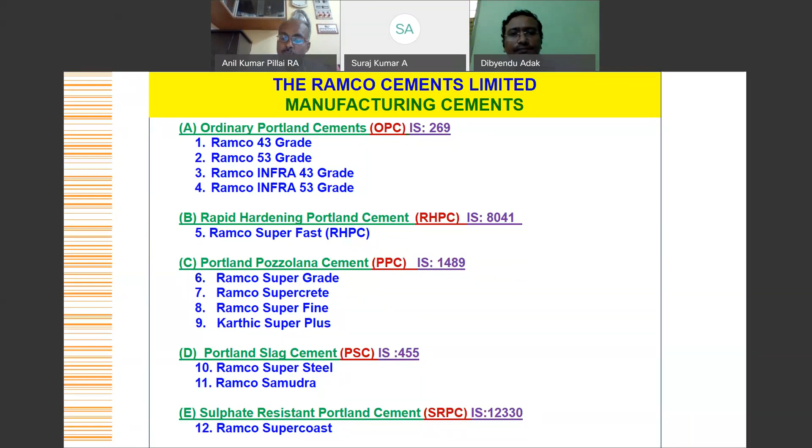Then we have the rapid hardening Portland cement for precast applications. Ramco Supercrete, which is specifically for concreting applications. Ramco Super Grade, Super Fine, Karthic Super Plus. Then we have the PSC cements for steel and Ramco Samudra. We have the SRPC cement, the sulfate resistant Portland cement, the Ramco Supercoast. So these are some of the types of cements that we are manufacturing, 12 brands of cement.

Then we also have the dry mix range of products, which is specifically used for non-structural applications. We have our dry mix plant at Sri Perumbudur in Chennai, and we manufacture dry mix products, which is in technical collaboration with MTech Germany.

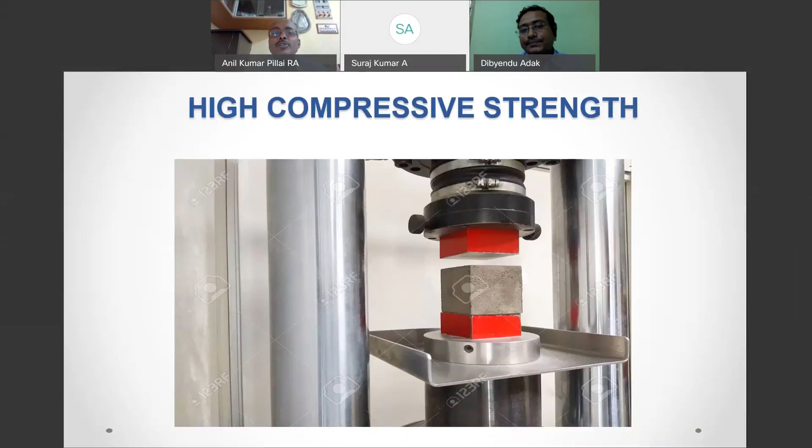Of course, we have got a number of responses as far as Ramco Supercrete is concerned. Ramco Supercrete cement is a specially formulated cement, which is giving high performance concrete, high compressive strength, and at the same time low heat of hydration, low lime leaching, and a better durable concrete is what you get. We have received response that they are able to get the 28-day compressive strength of concrete within 7 days.

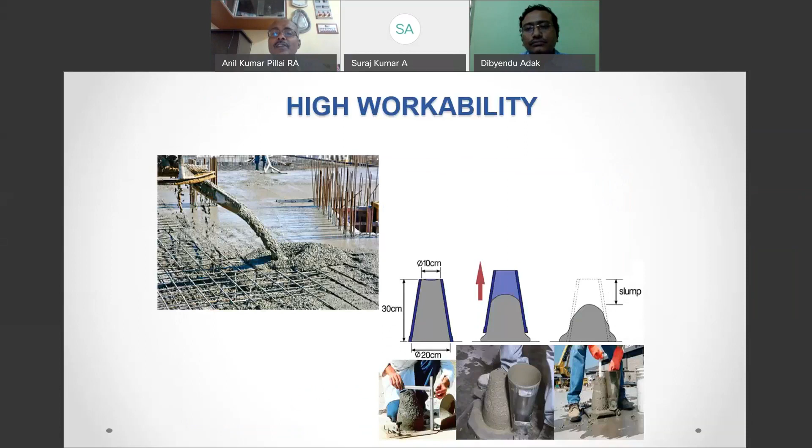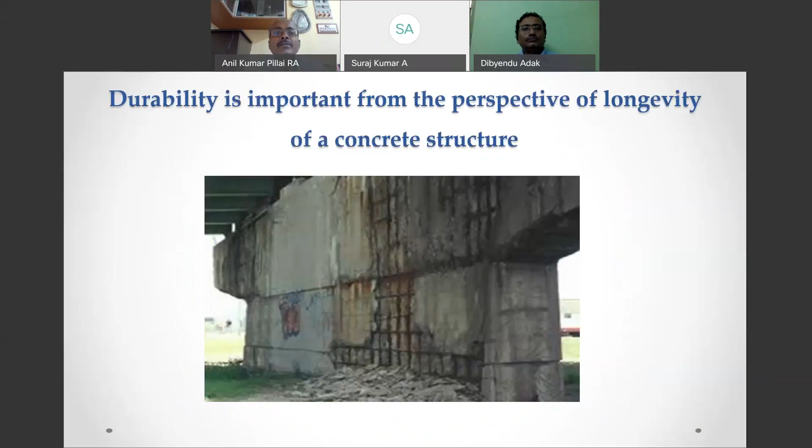So high compressive strength, high workability, because by virtue of being blended cement and as well as by virtue of having particle size distribution in cement, which is controlled, you get high workability, and of course you have the enhanced durability. So we have these important parameters in Ramco Supercrete cement itself, which is being used.

And all this has been made possible because of our research and development center, the Ramco Research and Development Center, where we are doing a number of works on concrete mix design, number of tests, and we have the latest evaluation instruments and equipment, ranging from XRD, XRF, and we have the various types of microscopes to study the characteristics of cement paste.

That is very important because we need to understand what is the property of materials that is there, which is very important from an engineering perspective.

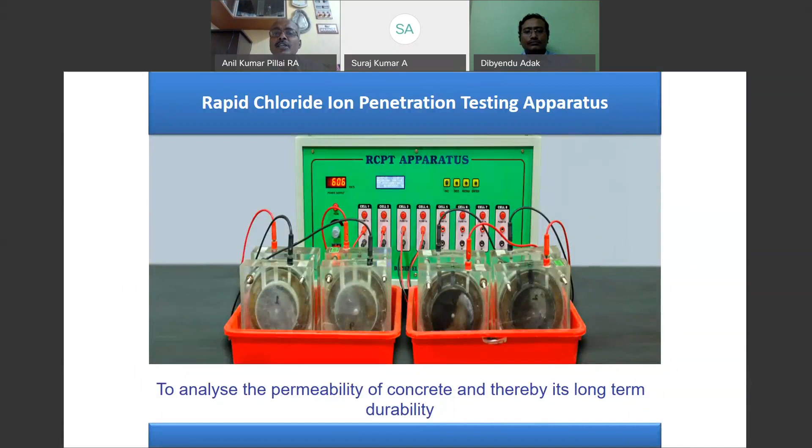Of course, we give a lot of emphasis on durability of concrete, for which we have the various instruments for checking the permeability of concrete, the rapid chloride penetration test, where the concrete specimen is kept, and based on the amount of charge that is passed, you get an idea of the durability of concrete.

So these are some of the things that we have got, and we have also got the DIN standard water permeability test for checking the durability of concrete. Again, instead of rapid chloride, we have the water permeability that is also there.

And of course, the theme is right product for right application, for which we need to understand the type of concrete that is being used.

Various awards that Ramco Cements has received, of course, for leadership in point source and fugitive dust control, leadership in technology and energy efficiency, leadership in utilization of blending materials.

So some of our customers, ranging from big names in the construction industry, where we have been able to give concrete, they have been able to make concrete for various exposure conditions and various concrete grades and various workability and various requirements. So that helps us to make a good quality cement.

As far as today's speaker is concerned, Dr. Dibyendu Adak, who has joined us from NIT Meghalaya. He holds an ME and PhD in civil engineering from Jadavpur University, Kolkata, India. He is currently an assistant professor of civil engineering at National Institute of Technology, Meghalaya, Shillong, and he has over 5 years experience in teaching, research, professional and consultancy activities.

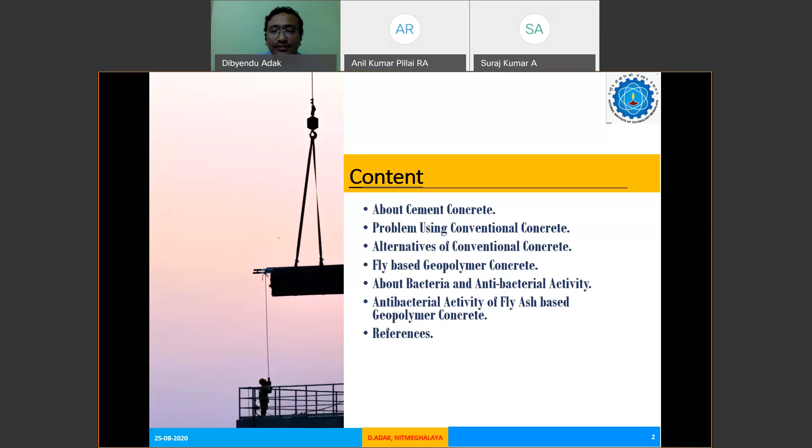Cement allows the aggregates to come together and make a heterogeneous mix, forming concrete. So cement is the main thing.

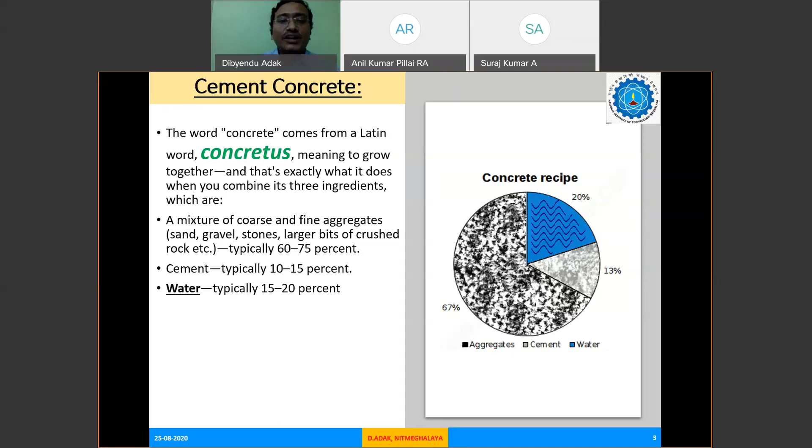But due to rapid urbanization, industrial growth, and day-by-day development of the country, the requirement for cement is increasing. Due to this rapid production of cement, we face certain problems - environmental impacts from cement production. For instance, in 2019 there was a Times of India news report stating that cement production causes more pollution than all trucks in the world.

Also, in 2012, a draft from Columbia University stated that by 2006 cement production was 2.55 billion tons, but would be enhanced to 3.7 to 4.4 billion tons by 2050. But a recent report in 2017 shows we have already achieved that value, which is more than 4.4 billion tons.

So in 2017, that was achieved: 4 billion tons. So when 2050 will come, we think that may be 10 times or 20 times. That will cause pollution. As China is the major producing country, they are producing more cement and also releasing more carbon dioxide into the atmosphere, which is harmful for global warming.

These are the environmental perspectives. Other than this, we can say that cement plants also emit carbon dioxide that causes problems in human health. The maximum problems will be respiratory system disorders, lung cancer, all these things.

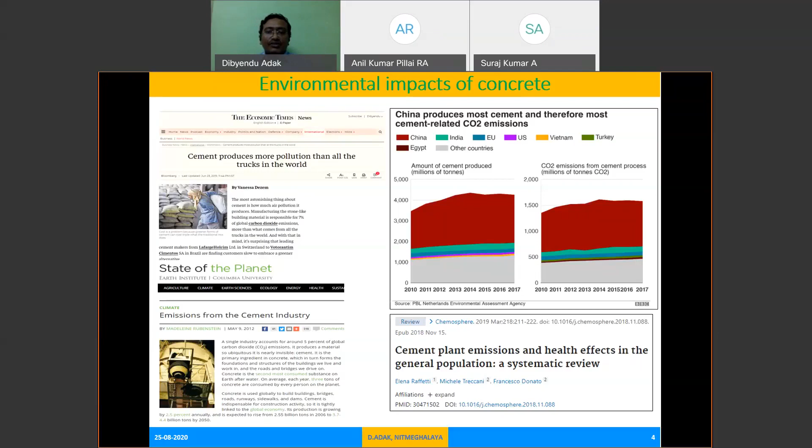So to eliminate all these things, what we have to do is find alternatives. And what will be the alternative? We have to reduce the production of cement, and in place of that, add certain material which will give the same strength and durability as cement concrete. The solution is we take a replacement material for cement which doesn't have any toxicity effect on the atmospheric environment. We have to find an alternative from waste, or reuse, or any material.

We can also recycle material if possible to use in concrete. So to make a better environment, we have to reuse and reutilize all this material to prepare concrete.

These are some materials where research has gone on for the last two decades. There are a lot of materials we can use as replacement for cement. Fly ash is one of the major things researched and developed. Initially there was replacement of 10%, now we can replace up to 70%. Then there's steel plant waste product, slag, rice ash from rice mills, red mud concrete, fiber reinforcement concrete.

In case of recycling, we can use recycled aggregate from demolished structures or recycled paste. If we are able to recycle, then there will be no problem—we will solve the environmental hazards.

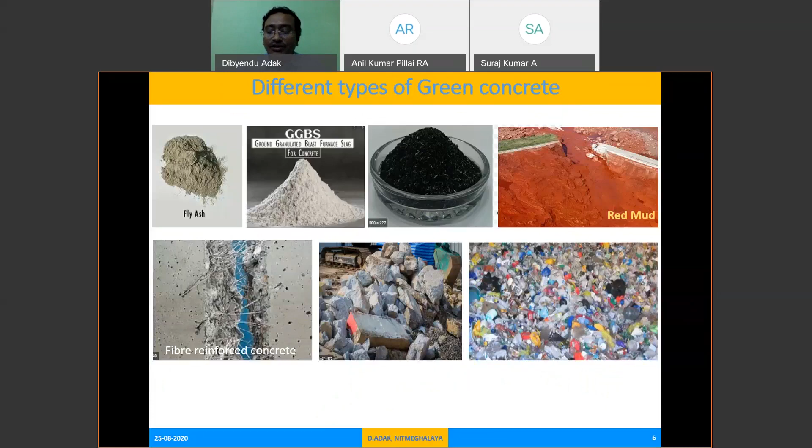Now, using fly ash concrete, my topic will discuss geopolymer concrete. What is geopolymer concrete? In this concrete, we replace 100% cement with fly ash and alkali activated solution—in place of water, we use the alkali activated solution.

So what we can do is reduce the production of OPC, and otherwise reuse fly ash, which is industrial waste and is nowadays a major problem in our country since a huge amount of fly ash is produced throughout the year. We can use that fly ash to reduce its toxicity effect on the environment.

Now I will discuss geopolymer technology. Geopolymer is a polymerization technique. This will be polymerized in the presence of alkaline material and alumina and silica source material. This geopolymerization is a polymerization chain that produces the polymer chain of silica, alumina, and oxide.

That may be one polymer chain of silica and oxygen, called siloxo. Another may be sialate-siloxo, then sialate-disiloxo. These are the polymeric chains, produced due to alkali activation of the cement and the silica and alumina present in the fly ash.

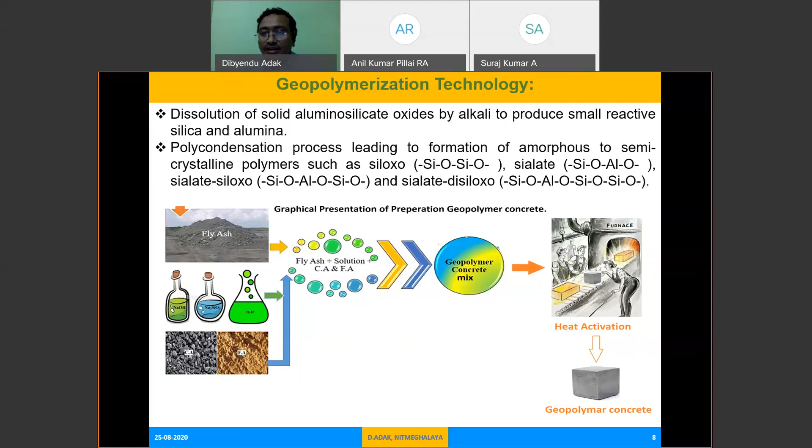Now this is a major drawback of geopolymer concrete: we have to cure the geopolymer specimen to achieve proper strength and durability. As heat curing process is needed in geopolymer concrete, this may be the major disadvantage. If heat curing is needed, we cannot apply it as a structural element.

Same concrete we will not be able to use to prepare the structural element, so the study will be limited to the precast concrete element only. But that is not our aim. We will focus on geopolymer concrete as a replacement for normal cement concrete, with strength and durability equal to or more than normal cement concrete.

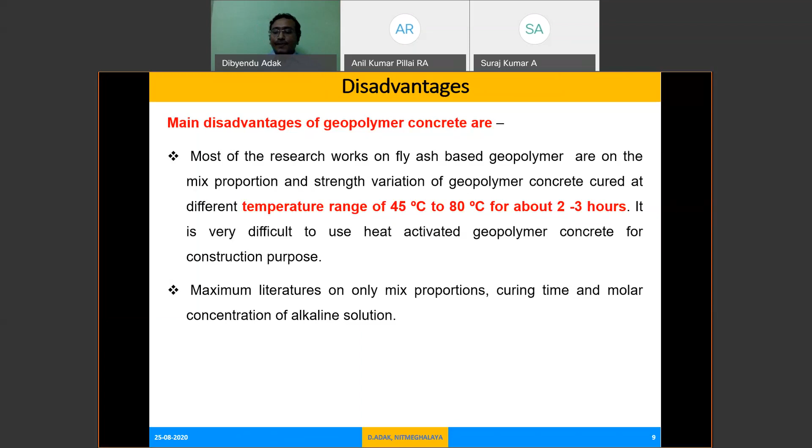So to eliminate these issues, here are the proposed solutions. Other than this, there are also a lot of other solutions. These are proposed to eliminate the heat activation from the geopolymerization process.

One major solution is the addition of nanosilica. Since geopolymerization is a polymerization process, and nanoparticles have high specific surface area, the addition of extra silica content accelerates the polymerization process. During this, the amorphous compound present in the fly ash is very rapidly transformed into crystalline compounds, which may be siloxosialate, disiloxosialate, and in presence of sodium hydroxide, sodium siloxaluminate. These are the different forms that may occur.

Other than this, another solution is there. In geopolymer concrete, the conventional technique is to add fly ash with alkali activated solution and fine or coarse aggregate, prepare the specimen, and then get the strength after heat activation. So if we modify the process technique, we can also prepare geopolymer concrete cured at ambient temperature. How can we modify this?

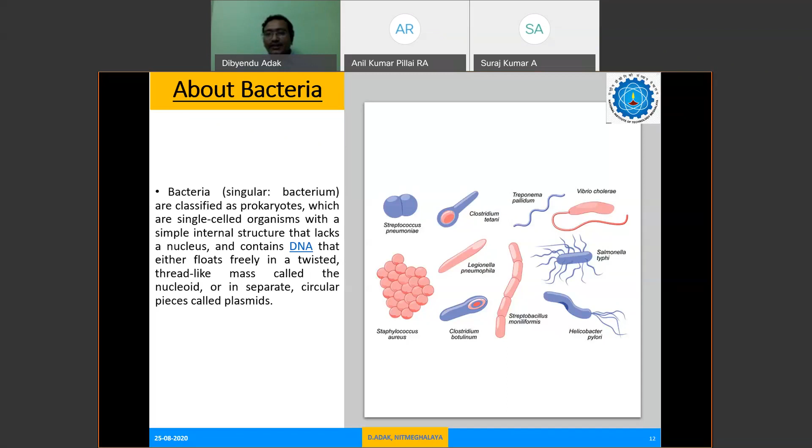Other than this, we can also characterize bacteria in terms of gram-positive and gram-negative. In 1884, Christian Gram distinguished bacteria into gram-positive and gram-negative. In gram-positive bacteria, we can see the cell membrane, then after the cell membrane there is the presence of a peptidoglycan layer, then the internal structure of DNA and so on.

But in case of gram-negative, there is the cell membrane, then peptidoglycan, then an additional lipoprotein layer. Since more layers are present in gram-negative bacteria, they are much more harmful—we cannot easily destroy their DNA because the outer peripheral layer, including the lipoprotein layer after peptidoglycan, is more extensive. That's why in normal human life we usually face diseases like cholera and typhoid, caused by Salmonella typhi.

This is the gram-negative bacteria. Our body cannot easily destroy these bacteria, so we need a certain amount of antibiotics. Those who have higher immunity can destroy them, but for normal cases we need certain antibiotics to destroy these typhoid-causing bacteria. So from gram-negative and gram-positive bacteria, what we can see is that the lifespan of gram-negative bacteria is more. They are much more resistant with respect to antibacterial drugs.

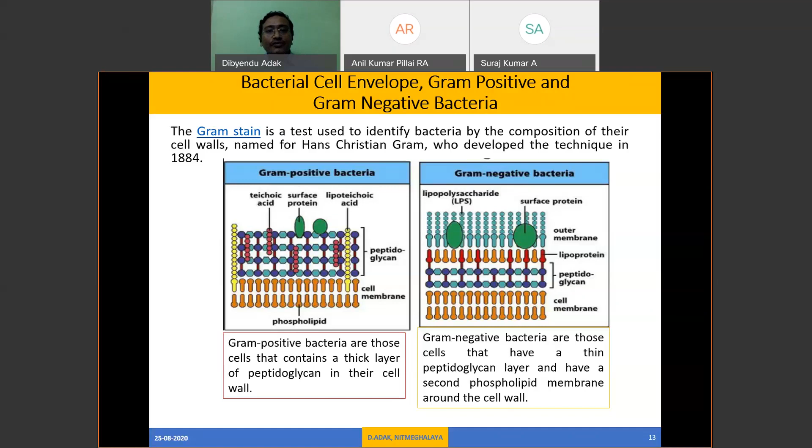So for our study, we have chosen two types: one gram-positive and one gram-negative bacteria. Gram-positive is S. aureus and gram-negative is the normal one, E. coli. So why have we taken these? Because their generation time is about 16 to 18 minutes - within 16 to 18 minutes they can double their family strength.

So if their doubling rate is more, and we do antibacterial study with this Staphylococcus aureus and E. coli, we can assume that we can easily destroy other bacteria whose doubling rate is more than 16 to 18 minutes. That's why we have taken Staphylococcus aureus and E. coli. Another thing is that these gram-positive and gram-negative bacteria have the maximum of all types of characteristics which are needed, which are present in other gram-negative or gram-positive bacteria.

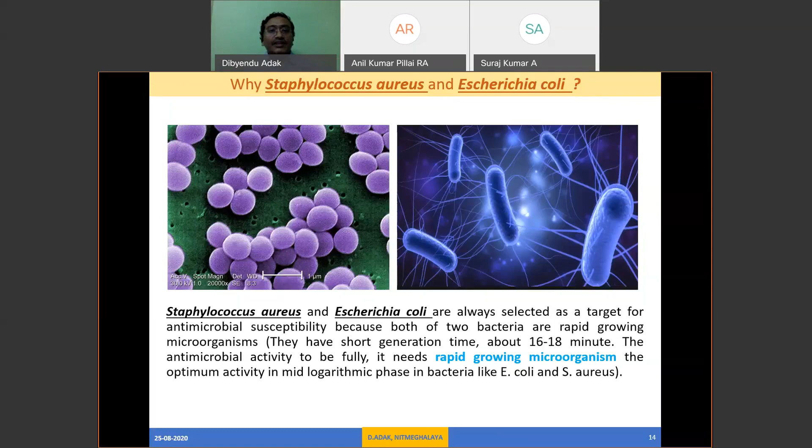Now next, for strength study, we have seen that concrete is weak in tension and strong in compression. So what will we study? We will study the compressive strength, the flexural strength, the split tensile strength, and for durability we will study the RCPT, water absorption, sulfate test, all these things.

Similarly, to determine the antibacterial activity - other than this there are a lot of studies, but today I'm going to discuss only these three topics - based on this we will determine the antibacterial property of our concrete.

One is the minimum inhibitory concentration, which we call MIC. So what is MIC? MIC is the minimum dose of the antibacterial agent which will stop the growth of the bacteria, meaning they will not be able to increase their family.

They will be stagnant if the cell content is 10 to the power 6 CFU per ml. Then if you add that antibiotic amount, say 0.1 milligram per liter, and the generation of the bacteria cell is stopped at 0.1 milligram per liter, we can say that the MIC value is 0.1 milligram per liter.

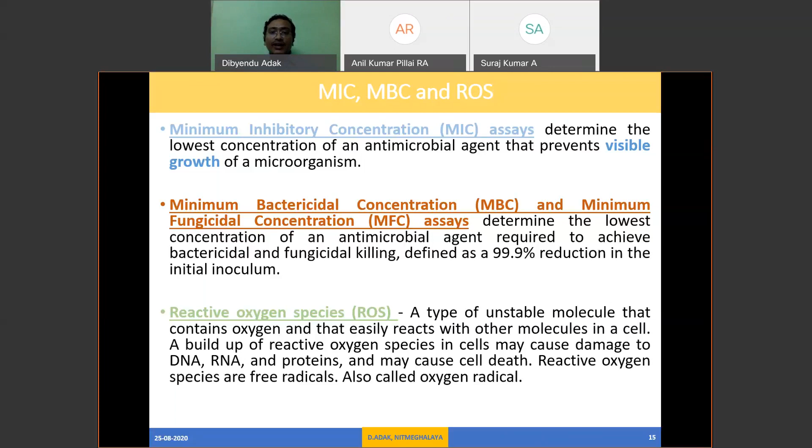At 4 milligrams per liter or microgram per liter, all the bacteria are destroyed - this is the MBC value. The MIC value is where the growth of bacteria, their generation or development, or cell count will not increase, but will be kept as it is.

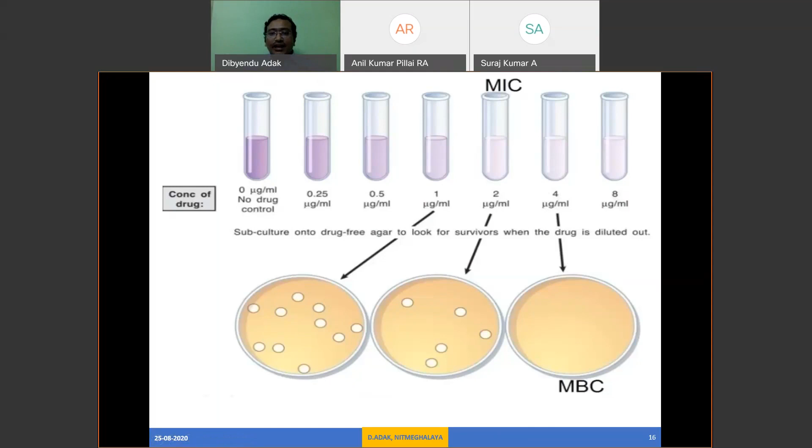Reactive oxygen species, as I told you, include the superoxide - these are anions, reactive ions, free radicals which initiate the destruction of the bacterial cell. That may be superoxide ion, oxygen with one unpaired electron, or there may be a hydrogen peroxide group. Hydrogen peroxide is a non-free radical, while oxygen and hydroxyl groups are free radicals. They kill the bacteria by improving their oxidation rate.

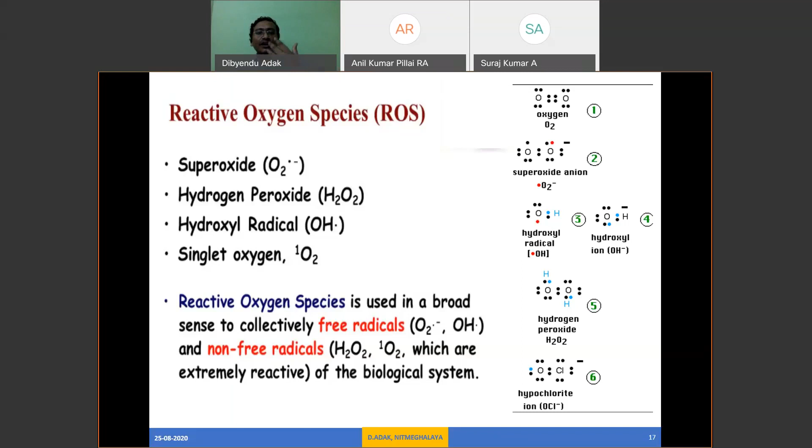And if the sulfur content is more, and the H2SO4, sulfuric acid or sulfurous acid content is more, they will attack the gypsum, they will attack the ettringite, and they can produce ettringite monosulfate, ettringite disulfate. By that, they can destroy the concrete.

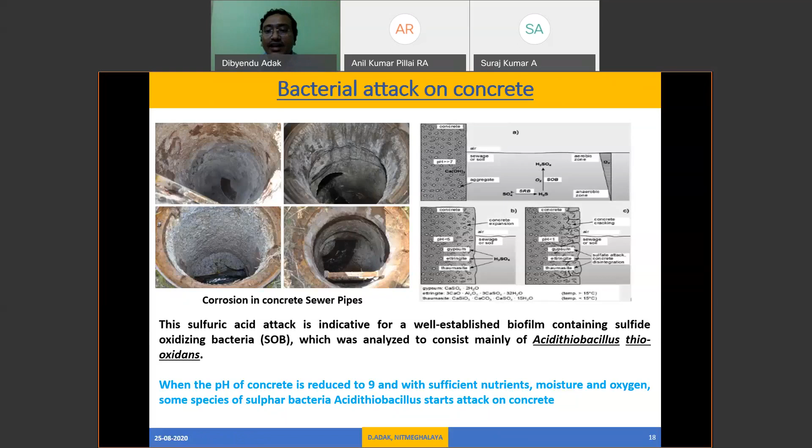So other than concrete, for RCC structures there will be corrosion, which may be caused by bacterial biofilm. Biofilm means some bacteria cells present over there. How do they cause corrosion of the reinforcement bar?

So what we can see in the marine environment is that there is a lot of aerobic bacteria present. If they deposit on the reinforcement steel bar in huge amounts, due to their oxidation process or respiratory process, their normal process, they reduce the oxygen concentration in the patches zone where they are stable.

If the oxygen concentration is less, then the electron transfer will be more. This gives anodic action, and in the reinforcement bar in the marine environment, this gives cathodic action. So electron transfer will start, and if electron transfer starts, corrosion will initiate. By this mechanism they can corrode the reinforcement bar within 2 or 3 years, depending on the concentration of marine water, salt concentration or ion concentration.

Okay, and these are feasible - based on studies of how these biofilms or bacterial cells are present in the corrosive zone.

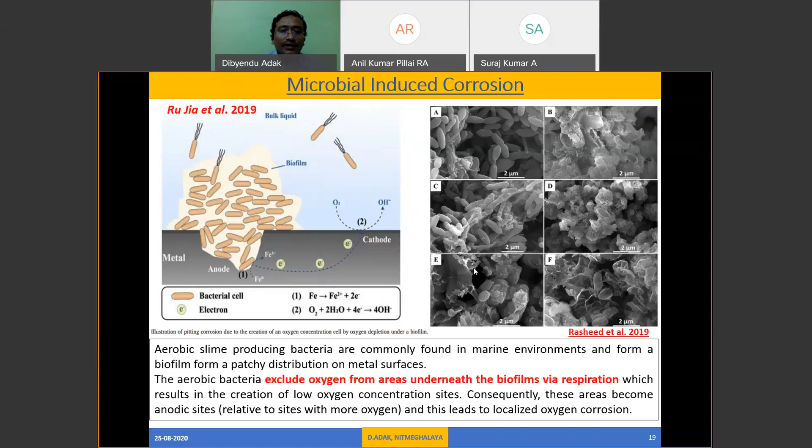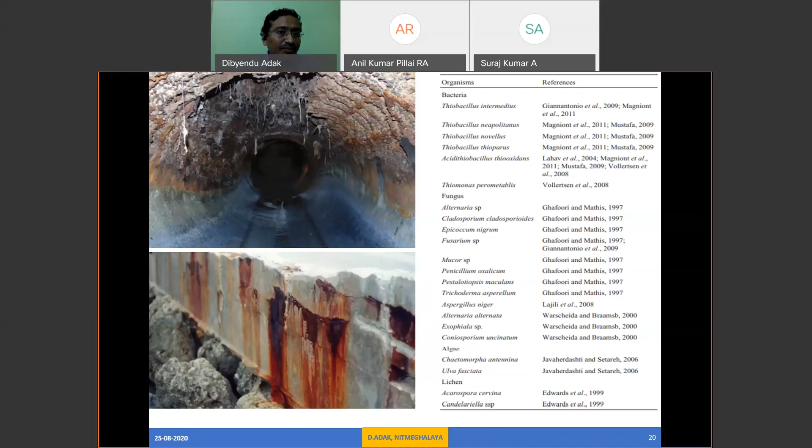Now next, other than these, there are a lot of bacteria - not only bacteria but fungus also - that destroy our concrete structure, or reduce the service life of concrete. These bacteria or fungus are tabulated here. A lot of researchers have reported these as harmful bacteria for our concrete structure. And in this side figure, we can see that due to corrosion or due to sulfur oxidizing bacteria, the service life of the concrete will be reduced.

Now, as civil engineers, we will not concentrate only on antibacterial efficiency or antibacterial activity. We need a concrete which will give better strength, which will give an alternative to cement for our society. We will give a cement that provides better strength and better durability. Then another criteria is that if it also gives better antibacterial property, we will be benefited much more in increasing the service life.

So first, in this presentation content, I will show you the strength property of the geopolymer concrete, then antibacterial property, and strength and durability - compressive strength, flexural strength, split tensile strength, RCPT test, sulfate test, and corrosion test.

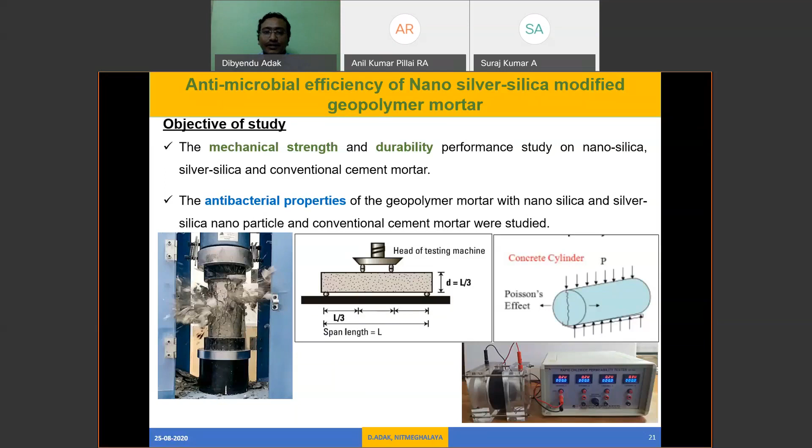So these are the reagents used for the antibacterial study. One is normal fly ash, as I've told you, the study is based on fly ash based geopolymer concrete - fly ash is the basic element - and there is sand, alkali activator fluid, which is a combination of sodium hydroxide and sodium silicate with colloidal nanosilica. And to compare the antibacterial activity of the geopolymer concrete, ordinary Portland cement mortar has also been prepared for the antibacterial study.

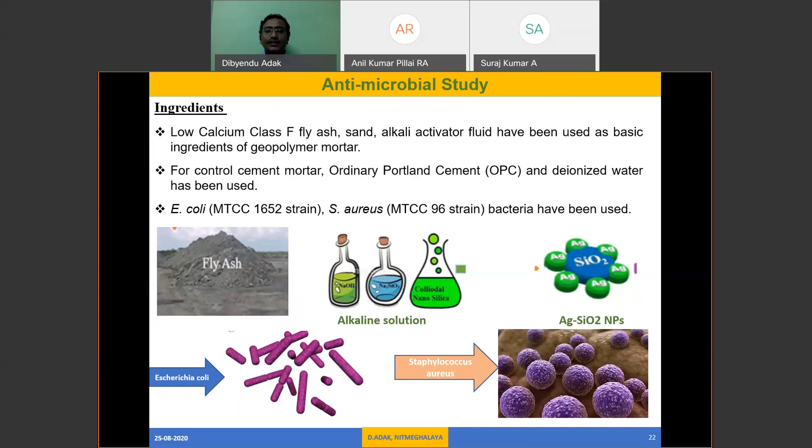As I have told previously, one gram-negative and one gram-positive bacteria have been used for the antibacterial study. For this study, I have not added the silver nanoparticle directly into the geopolymer concrete mix.

What I have done is prepare the silver-silica nanocomposite using the Stober method. We added 100 millimolar of colloidal nanosilica with 5 millimolar silver nitrate solution, then mixed in a magnetic stirrer for 6 hours. This produces the silver-silica nanoparticle.

We used 6% silver nanoparticle content and 6% silica nanoparticle content. This is based on a research study which found that 6% nanosilica gives better strength to geopolymer concrete cured at ambient temperature.

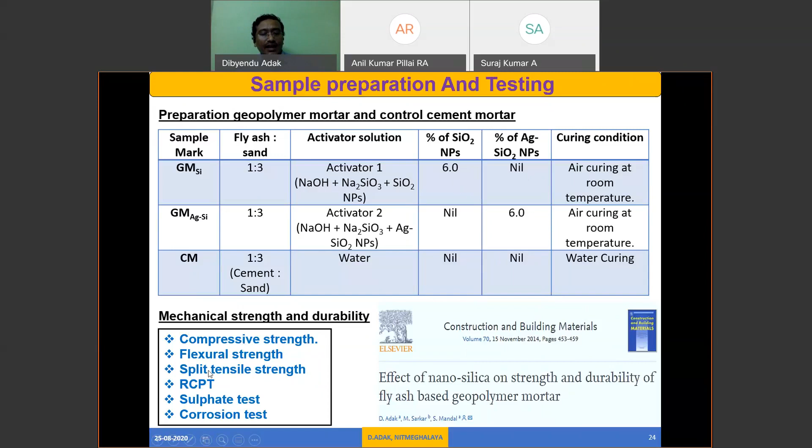Based on these three mixes, I will first show you the results on compressive strength, flexural strength, RCPT value, and then the antibacterial property. So the antibacterial property was studied as follows.

We know that at the initial stage, the pH value of the concrete mix is near about 12 to 13. At a high pH or early age of the structure, we cannot see any bacterial attack on the concrete, because these bacteria cannot survive in high pH. So we have to wait a long time until the pH value decreases, but in lab scale this would be time consuming.

So what we did was prepare the mortar specimen and place it in a 0.5 normal carbonic acid solution for a long duration, until the solution's pH became less than 9. When the solution pH was less than 9, we took the mortar specimen and studied the antibacterial property.

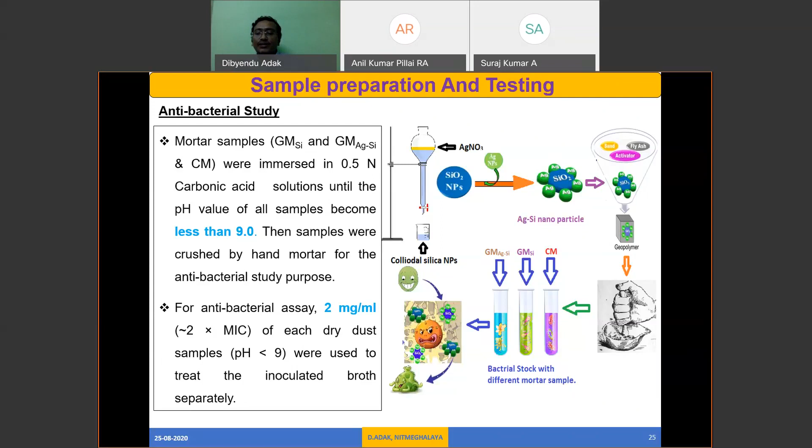The antibacterial property was studied using four methods. One is the bacterial kinetic study, which is based on two methods: the viable plate count method and the spectrophotometric method.

In my study, I used the plate count method, which has two types: the pour plate method and the normal plate spreading method.

In the pour plate method, the technique is to add your antibacterial agent into the bacterial stock, then place the stock onto an agar plate and rotate at a certain RPM. Then you can see the colonies of bacteria spread, and we count them one by one.

In the spread technique, from one large stock we take a small amount of solution containing the antibacterial agent and the bacterial cell, spread it on the agar plate, and wait maybe 1 or 2 hours. Then we count the number of colonies in that area.

MIC and MBC I've already discussed: MIC is the minimum concentration required to stabilize bacterial growth, and MBC is the minimum concentration required to destroy the bacteria. Reactive oxygen species, such as hydroxyl ions or unpaired electron superoxides, start oxidizing and kill the bacteria.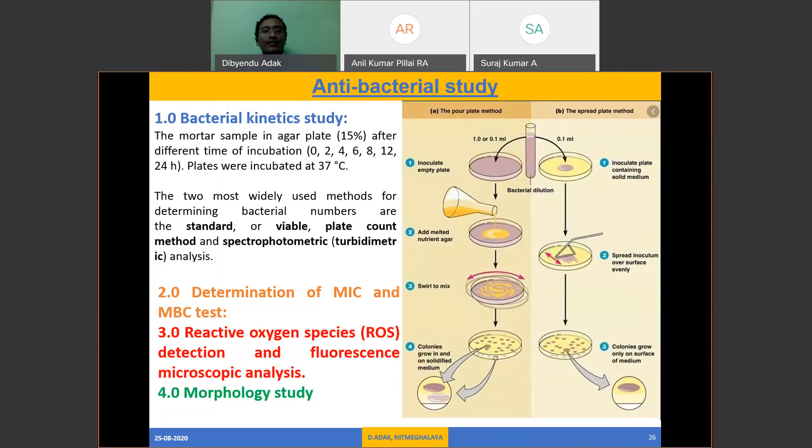Another method is the morphological study. Now let's come to the results of whichever method we have taken.

First, we prepared the silver-silica nanocomposite. From the figure shown, we have confirmed whether we were able to prepare the silver-silica nanocomposite using the Stober method.

Image A shows the nanosilica, and image B shows silver-silica, where the black dots are the silver particles present in the silica nanocomposite. Also from the EDS analysis, you can see that the silver (Ag) peak is present.

This study was also confirmed with the zeta potential method and the XRD method, confirming that the material is silver-silica. The preparation of the silver-silica nanomaterial is thus complete.

Based on the 6% silver silica nanocomposite and silica nanocomposite, these are the composite strength study results. After 28 days at normal environment temperature curing, the geopolymer concrete with silver silica and normal nano silica give almost the same type of strength, near about 41 or 42 MPa. Similarly, flexural strength is almost the same, split tensile strength is almost similar, and the RCPT value is also same.

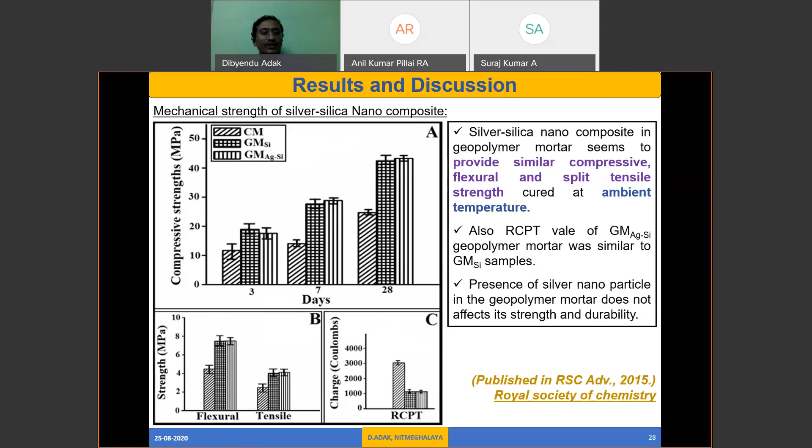Now we will go for the antibacterial study. In this antibacterial study, we have studied mortality. First we have seen the agar plate. This one is A, meaning gram negative bacteria agar plate cell, and B is the gram positive bacteria agar plate cell.

After waiting 6 hours, the control cement mortar has a huge amount of live bacterial cells present. The colloidal nanoparticle silica geopolymer mortar also has a huge number of live bacterial cells. But in case of the silver silica nanocomposite, the bacterial cell count is very less.

Similarly, for gram negative bacteria we can see the same type of property. In the mortality curve, the black line denotes the silver silica nanocomposite based geopolymer mortar. After 2 hours, around 80% of the bacteria is killed in presence of the silver silica nanocomposite.

In case of the colloidal nanosilica based geopolymer and control mortar, the bacteria killed is up to maybe 60% or 55%. We have to wait a longer time for mortality to study the mortality curve.

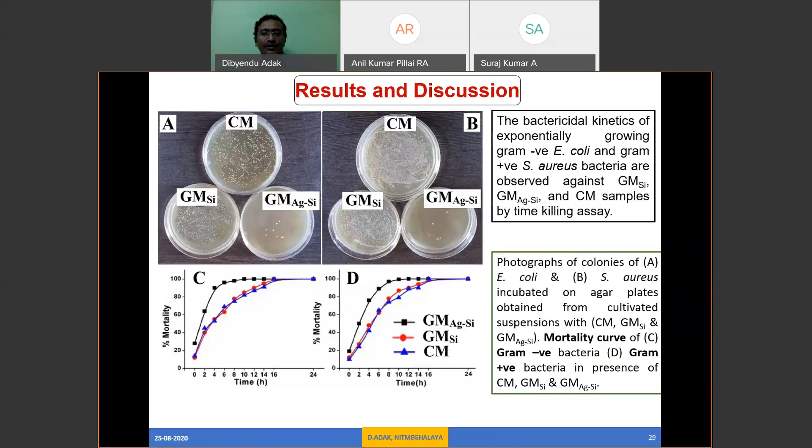Next, the MIC and MBC values are much more needed for this antibacterial study. For the E. coli gram negative bacteria, the MIC value is 0.1 and for S. aureus, the value is 0.15. Similarly, the MBC value is there. From this MIC and MBC value, we can say that at 0.1 milligram per millilitre, if you add the silver silica geopolymer mortar in the bacterial stock, they can stop their growth.

Similarly, if you add 0.32 milligram per millilitre, they will kill all the E. coli bacteria. So from this MIC and MBC, we can say that the silver silica nanocomposite treated cells are not more than 4 times the MIC value, and the MBC value is also not more than 4 times.

Based on these values, we can report that our nanocomposite is bactericidal rather than bacteriostatic. Bactericidal means these silver silica nanocomposites will kill the bacteria, as I told you initially. Bacteriostatic, as we can see from this graphical figure, means we can make them stable - stable their rapid growth. But bactericidal means they will kill the bacteria.

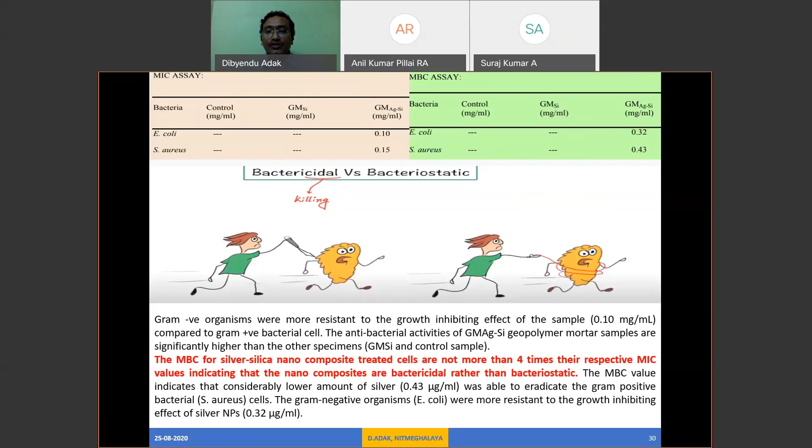So from this MIC and MBC study, we can say that our silver silica composite has much more capability to kill the bacteria, rather than just stabilizing the growth of the bacteria. Now these are the gram positive and gram negative bacterial studies.

Using SEM technique. First is E. coli bacteria with our normal cement concrete mix. Then E. coli bacteria with the geopolymer silica mix, and E. coli bacteria with silver silica nanocomposite.

These present the dead cells of E. coli. Similarly for S. aureus, the black dotted marks are the live cells. In case of normal concrete and in case of silica nanomaterial based concrete, or silver silica nano based concrete, we can see the dead cells are present over there in the SEM imaging.

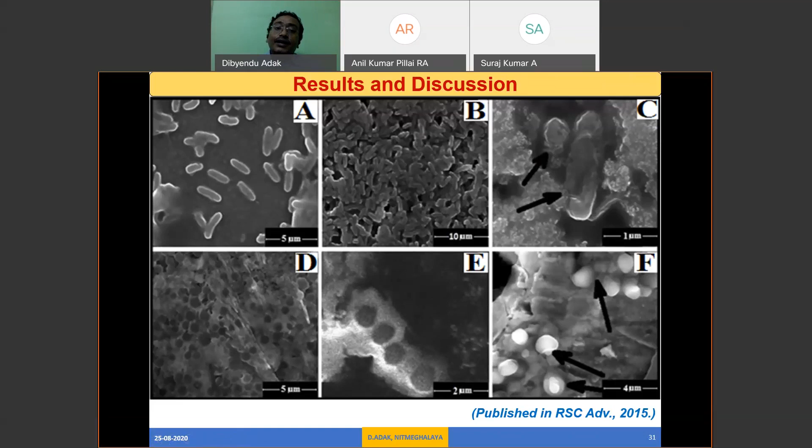So this is that SEM study, also confirmed using the fluorescent microscopic test. In this test we determine the number of dead cells in our stock solution or mix. To determine this we use propidium iodide as the stain. These are red fluorescent characters that will make the dead nucleus or dead cell appear red.

From this figure we can see the first one is normal concrete, the second is silica-based geopolymer concrete, and the third is silver-silica based geopolymer concrete. The first is E. coli, the second is S. aureus. In case of the silver-silica nanocomposite, the number of dead cells is much higher for both gram-positive and gram-negative bacteria.

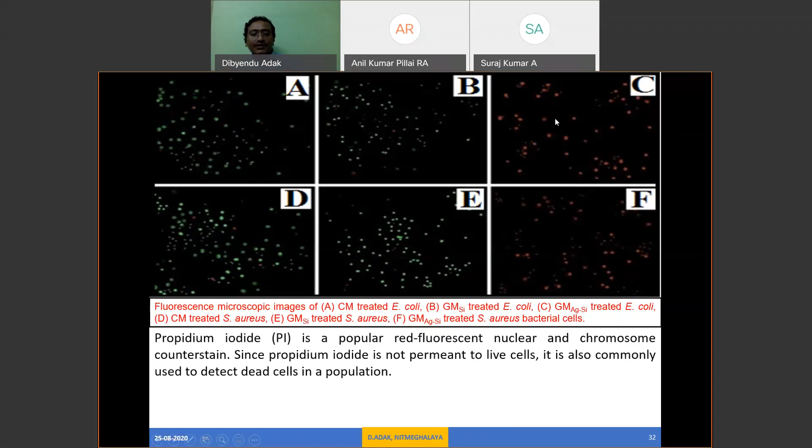Similarly, in the reactive oxygen species study, we see oxidizing agents or free radicals like superoxide ion or hydroxyl with an unpaired electron. Being much more unstable, they react with bacterial DNA and mitochondria to stabilize their unpaired electron. During this oxidization, they destroy the DNA and mitochondria.

So we can see that GM Ag-Si, the silver-silica based geopolymer concrete, has much higher reactive oxygen species than the control mortar and the geopolymer mortar with silica alone.

These are the DNA cell study results. In lane 3 we see the silver-silica based sample, which is E. coli treated with silver-silica. The DNA shows spreading, meaning the DNA is destroyed or almost destroyed.

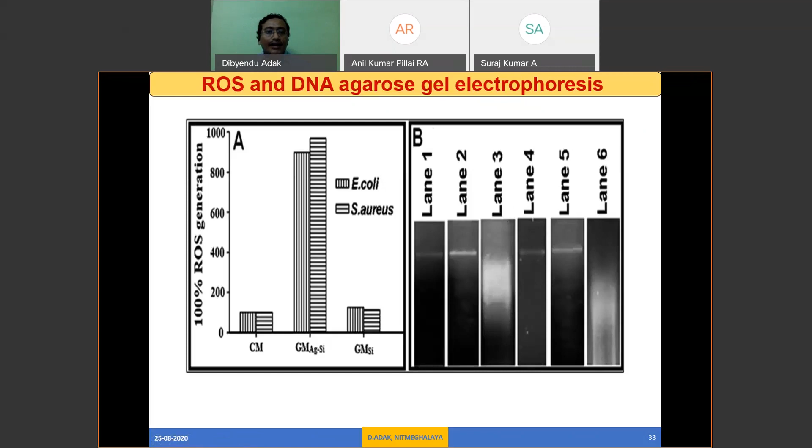Finally, what we can conclude is that in the silver-silica nanomaterial based composite we prepared, the main reason for antibacterial action is that the silver nanoparticles destroy the amino acids present in the bacteria, and during this process they release subsequent hydroxyl radical formation, which destroys bacterial components.

They take part in the reactive oxygen species formation, so with the presence of silver nanoparticles, they can easily destroy the bacteria.

In addition, these silver-silica based geopolymer concretes give better antibacterial property as well as strength than other types of concrete.

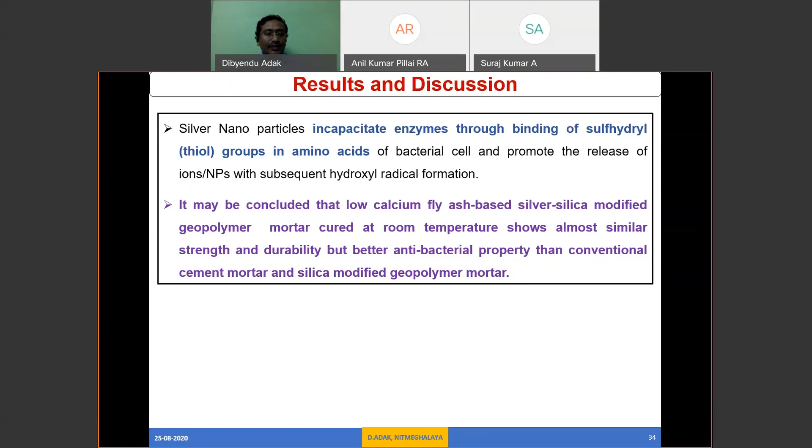This study is a combination of bacterial study, microbiological study, and related fields, so for a single person I could not focus on all these things alone. These collaborators and my guide have helped me understand the biotechnological impact on concrete in this antibacterial study.